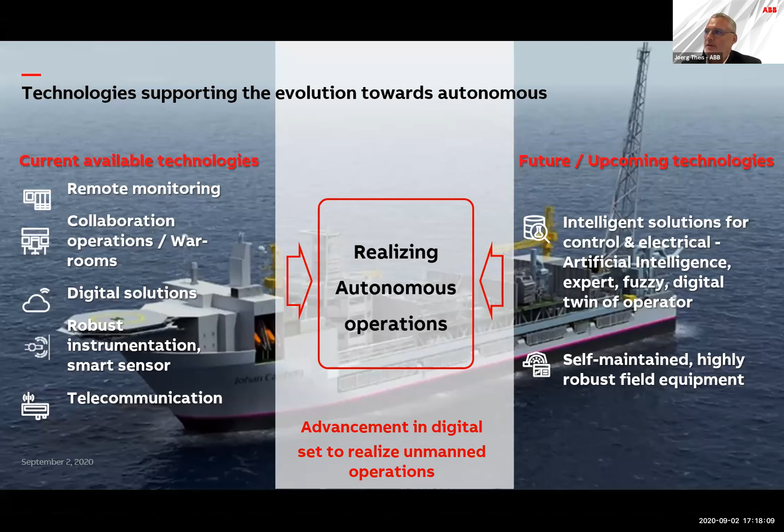So digital is definitely one element which can really help us address the challenges we are facing today. Going to the next example: remote. We see more and more that remote is becoming the new normal. I remember from last year's discussion that oil and gas, especially the FPSO industry, is quite conservative — and I fully understand this, to really go for reliable and proven technology.

But now, especially — this is a real life case we had with a customer who doesn't have digital in place, who doesn't have a good connection from his FPSO to the land site. He called us with a problem on one of his switch gears, which had started to impact his offloading and water injection.

That could definitely have caused a loss of production for him. Based on current regulations, we offered to send an engineer, but it would take more than two weeks to get him on the FPSO to fix the problem — something not acceptable for the customer. So we said, okay, we have solutions available today. Are you willing to test it?

The customer agreed, and we started what we call remote insight. It uses limited bandwidth of communication and some AI type of application, and we set up everything within 2 days.

We were then able to use our experts from around the world together with an operator of the customer using VR goggles to check the situation, eliminate the root cause of the error, and fix it.

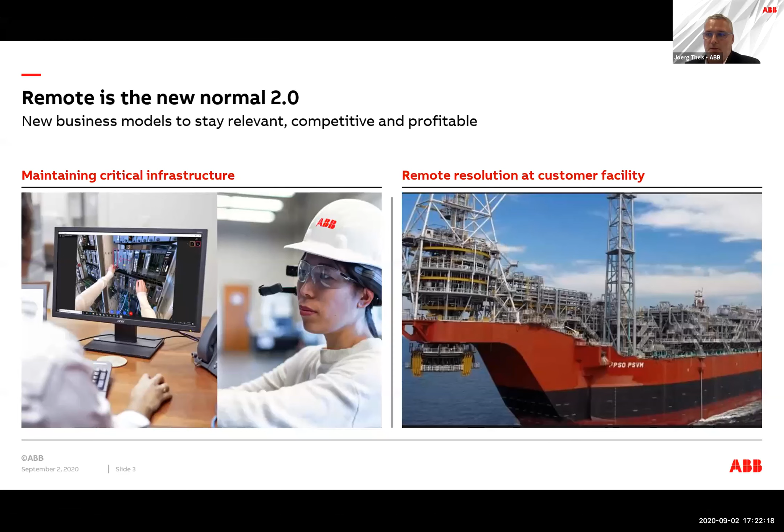Coming to the next model, and this is a case study with OKEA. The plant is rather old, from the 90s, so not very well digitally connected, and the customer is facing obsolescence problems. The key topic here is that we're really trying to have a collaboration in place with the customer to figure out how we can make those things happen.

One key element here was that we are really dealing with raw data. We're not consolidating data and sending a concentrated set to the specialists. We now have an edge solution together with the customer, and we can send raw data within milliseconds to the collaboration center. The customer is able, with the raw data, to get much better insights than with consolidated data from a historian application running on site. Interesting message here also: it was not as complicated as we thought.

We can send raw data from at least 10,000 tags within milliseconds to the site. It's 180 kilometers from shore, so quite a distance already. By having the raw data, experts are able to predict much better, using much better mathematical instruments to derive key insights. And again, you don't need to be on site, you can do it remotely.

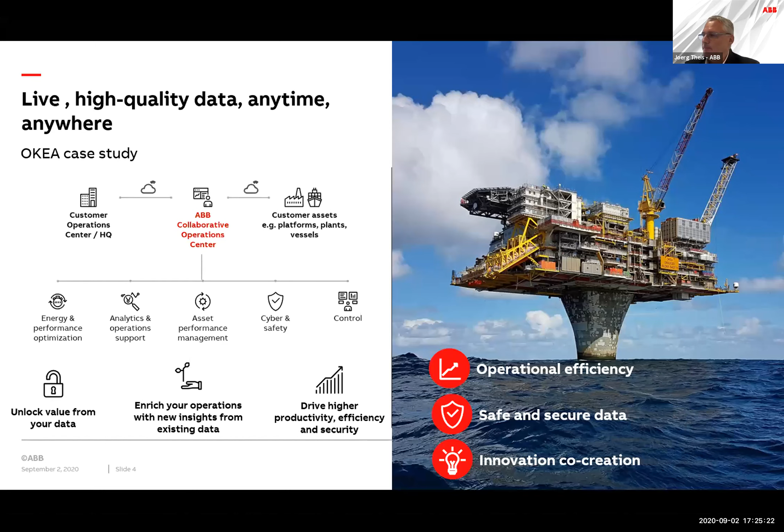Coming to a topic: we are all seeing now the market is becoming more unpredictable. I think the oil price was nearly turning into the red zone. A lot of challenges are going on in the market, and it's becoming faster where we have to react. For sure, all of this is definitely leading to the fact that we have to ask, okay, how can we do things smarter? How can we do things in a different way? And importantly, how can we be more efficient?

I know that oil and gas is very strong on its own type of standards, its own type of data models, and not sharing information even between companies, let alone outside companies, and of course not following any type of standards. But seeing how the market is going, seeing all the trends and pressure coming, we definitely have to start embracing some of the existing knowledge and technologies that are valid in other industries. I think automotive, for sure, is one of the trendsetters on how to do things in the most efficient way possible, how to embrace those elements.

And even if we don't jump to those type of elements, it's definitely worthwhile looking into the details and say, okay, what is it that we are able to do? On this slide, you see some elements which can only be done on the engineering side. I know we always think immediately about tools and low-cost engineering, but when we really go into the details, there are much more levers and elements you have to consider if you really want to become much more efficient.

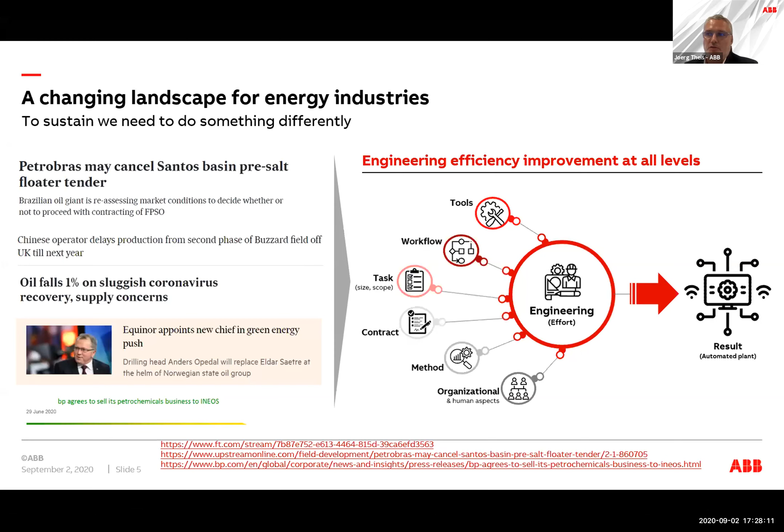Yeah, thanks, Jörg. And I think you have put up a few keywords which pretty much sum up the whole scenario here. You mentioned standardization, you mentioned data, and most importantly, you mentioned people. And from that perspective, people do projects, and the industry knows us as a large supplier of automation equipment, as supplier of electrical equipment, motors and drives, but we are also a very large project execution organization, always in pursuit of relentless execution.

Some of the figures that Jörg has talked about earlier - reducing capex, improving schedules, reducing start-up hours - those are the things that we have learned over the years executing large capital projects, using the levers, the processes, the technologies, and the people, whereby we are using different methodologies to actually reach these figures and make sure that we live up to our promises.

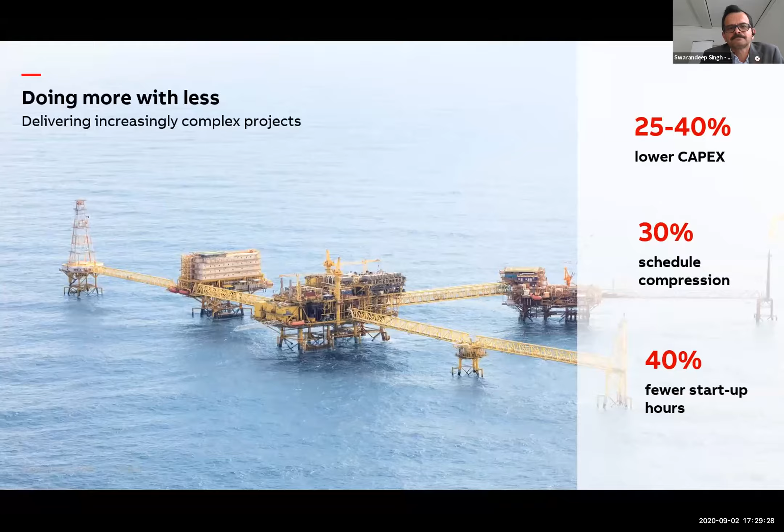If you go to the next slide, Jörg. So what we have been seeing in the past is before COVID, labor arbitrage was the thing. Most of the companies were leveraging their low-cost centers and trying to improve the cost and reduce the capex and the risk. And as we know, COVID has been a great disruptor here in the way we are going to work - remote abilities to work remotely, abilities to include more automation.

I think it acts as a catalyst, as was mentioned earlier, and then it allows us to use some of the modern technologies which we have at our hand and which we have been using for some years, but not as a common practice. So we are using virtualization, decoupling the hardware from the software, making the execution more predictable, bringing in a lot of standardization into our execution models and with respect to the solutions that we apply, a lot of reuse capabilities, which are allowed by the use of modern automation technologies. And all that sums up to the kind of promises that we have made earlier.

And all this is made possible because more and more customers are now being forced into this situation where they're embracing this kind of hyper automation, if I can use that word, so as to make sure that they are able to reduce their capex in case of large capital projects. If you go to the next slide, Jörg.

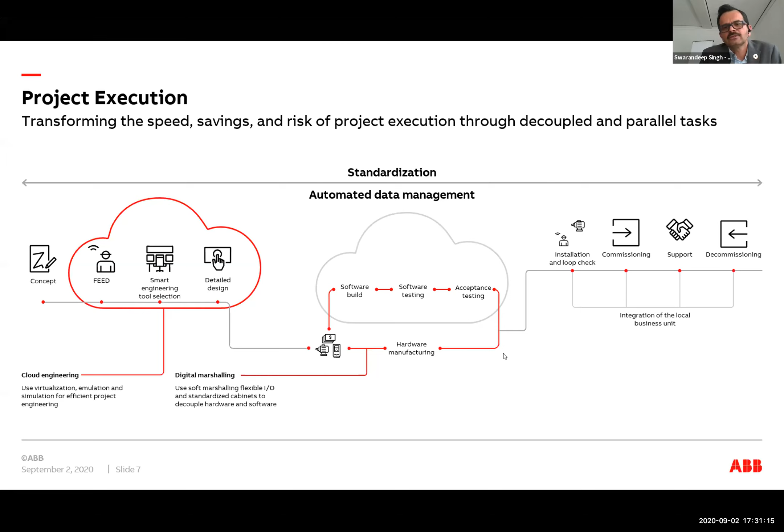So more recently, we have a couple of examples here. We have a project, Johan Castberg, that's an FPSO in Norway being built currently in an FAT stage for Equinor. And here we are using the remote FAT capabilities that we have developed. We have used some of the modern technologies inside the project execution, stuff like decoupling the hardware from the software, a more data-driven approach to execution rather than based on documents. So we have created interfaces, APIs and tools whereby we can import data from the various engineering contractors into our internal engineering systems and reduce manual work, which then improves the cost, improves the quality, and then you have less errors at site, which allows you to start up on time.

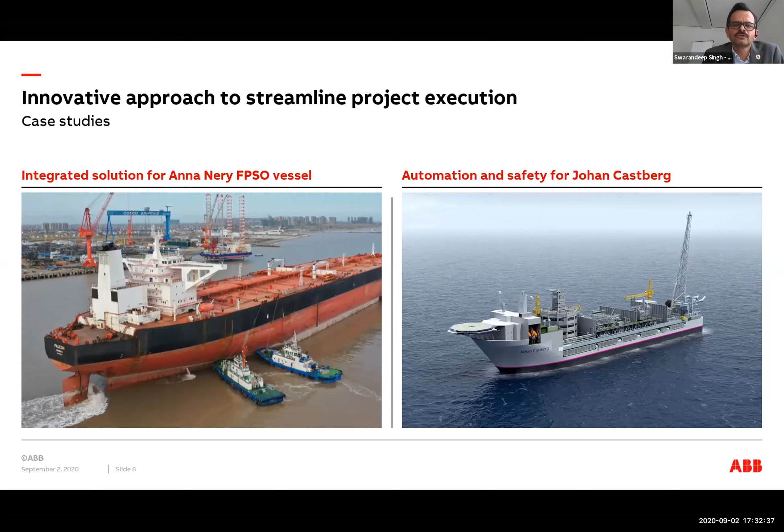So what we see is we started off with this transactional approach of having these point solutions. We have tasks, different tools, different methods related to agile and lean, all leading up to how we can make projects more cost effective, how we can deliver on time, and how we can reduce risk. Those are more tactical and transactional tools that we have at hand.

But the industry is also now going towards a more strategic approach whereby we are getting into a different kind of contracting model which allows us to improve the way we work together. It improves collaboration, so we have less interactions, less conflicts, and less interfaces.

We have also had such experiences with some projects around the globe, specifically with Aker BP in Norway. For some of their projects, they have already gotten into this alliancing kind of agreement whereby it's a win-win for all the contracting partners.

So I think the industry is definitely in a transformative mood now, which is being catalyzed by the COVID disruption. We would definitely see that the tools, methods, and efficiencies that we have developed over the years, we are able to synchronize them and apply them to upcoming projects, thereby improving the costs and efficiencies, and delivering on time and on budget to our customers.

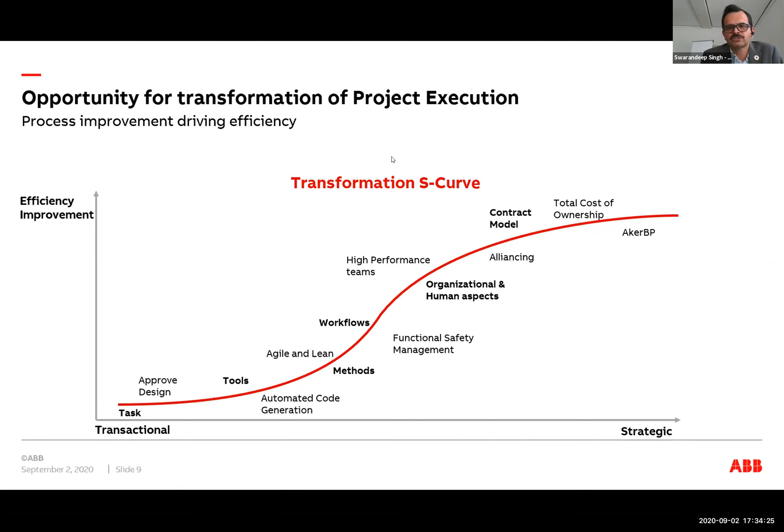Yeah, so that was a quick view on some of the project execution aspects which we are working on currently, and also where the industry is leading into. So I think we can field some questions if there are any.

Yeah, that's great, Jörg and Swarandeep. I liked how you mentioned the people element. They like to quote that something like 70 or 80% of digital transformation pilot projects fail because people don't take account of the people element.

Correct. They still have the same sort of decision hierarchies. They don't use agile teams, they don't change workflows. How do you work with customers to change how they're changing this kind of work culture and workflows? Do you give them advice? How do you help the customer?

I think that's a very good discussion, because we have exactly experienced this in an example where we had a ready solution, and the solution was really working and was in place, but the customer was still working as it was always getting done before. Then when we started discussing it, they started realizing how important it is to really have this type of change management.

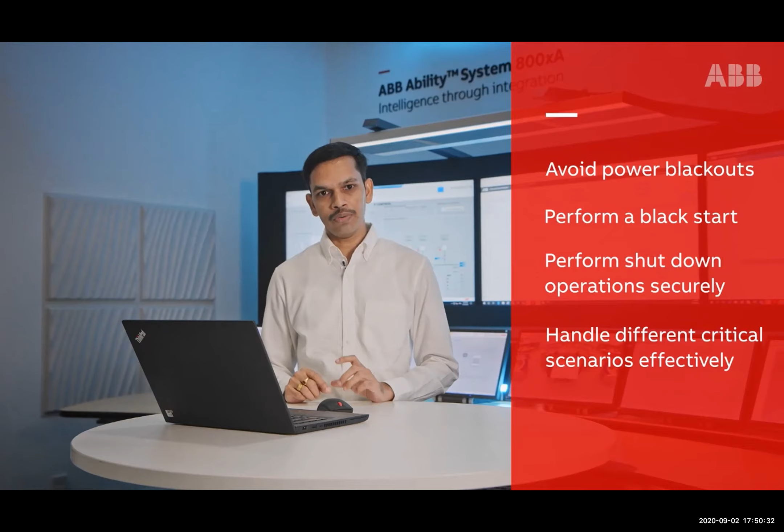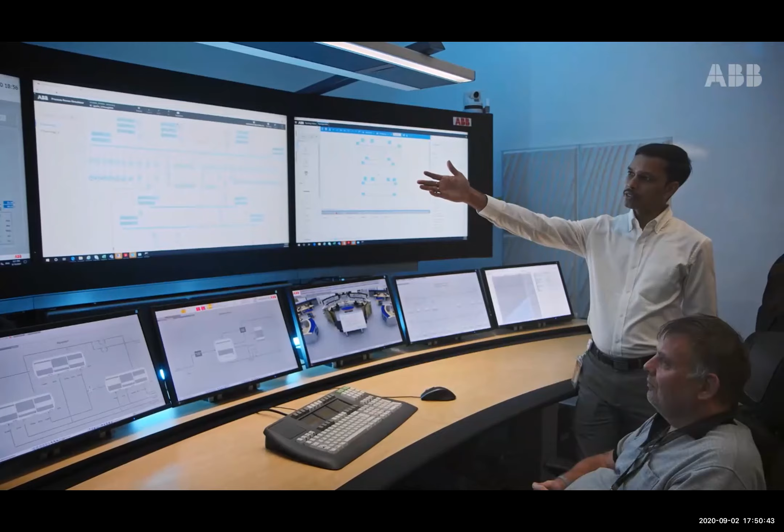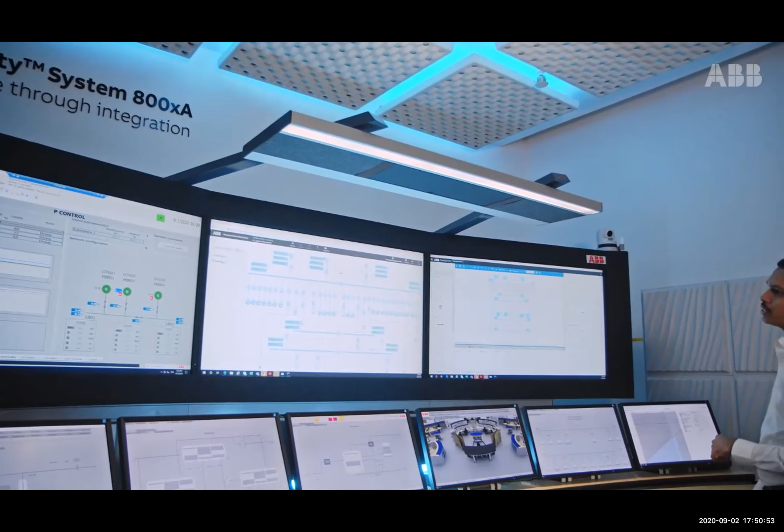ABB Process Power Simulator has a unique function and goes beyond what a process model vendor typically provides, as it combines a copy of the electrical plant control system along with simulated electrical dynamics to provide the operator with a more live-like experience. Integrating with the control system provides a digital twin for your operations.

In other words, it's a safe way to train your operator to learn the system which they rely on in real-life scenarios. Process Power Simulator has two parts: a topology editor to build an electrical model, and secondly, an instructor workplace to simulate different electrical scenarios. Let us take a look at how to demonstrate building an electrical network using the topology editor.

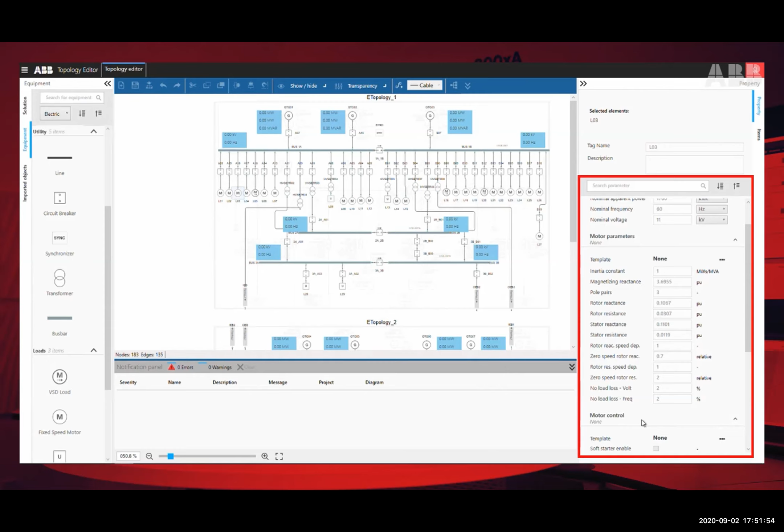ABB Process Power Simulator makes it easy to create an electrical model with a single line diagram. Through a topology editor, you can build your own electrical model by dragging components and connecting them to the electrical network. You can also set basic and advanced parameter settings of the equipment to replicate your plant behavior and then save the model. Next, you can switch to the instructor workplace to simulate plant electrical dynamics for different scenarios.

Here in the instructor workplace, we can create different scenarios by selecting and controlling motors, circuit breakers, and generators. ABB Process Power Simulator dynamically models frequency, voltage, active power and reactive power according to the equipment characteristics and generator response you define in the topology editor. To test electrical dynamics, we will run through the scenarios which are most frequent in FPSO operations.

Let's begin with starting a generator. To start a generator, click on the generator, make sure it is in local, and press the start button. Once you start, the generator builds up its voltage and frequency like you see on the screen. Once it reaches rated voltage and frequency, we can close breaker A15 to connect this generator to the network.

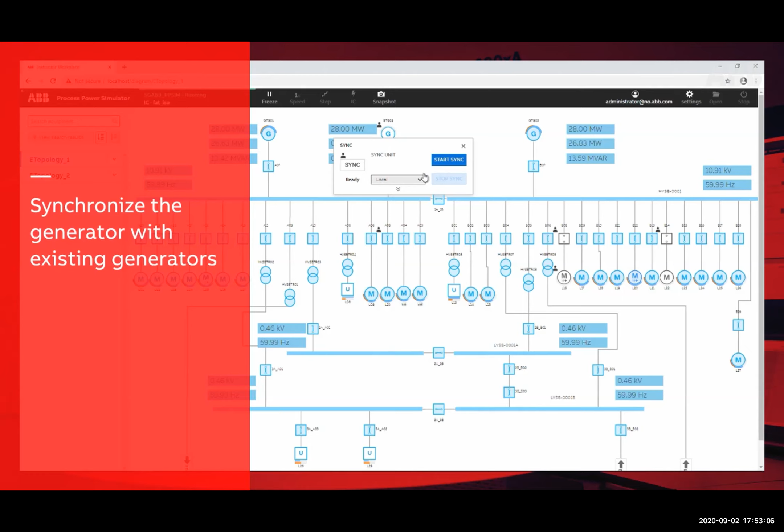To close breaker A15, we have to go through a synchronization process. To synchronize A15 to the network, select the sync module, select the breaker we want to close, select the generators we want to synchronize, then click on the synchronization module and start synchronization. Once you press start, the synchronization process begins, increasing and decreasing frequency with respect to variable and reference. Once it matches, it closes the circuit breaker. Now you can see all three generators are connected to the network.

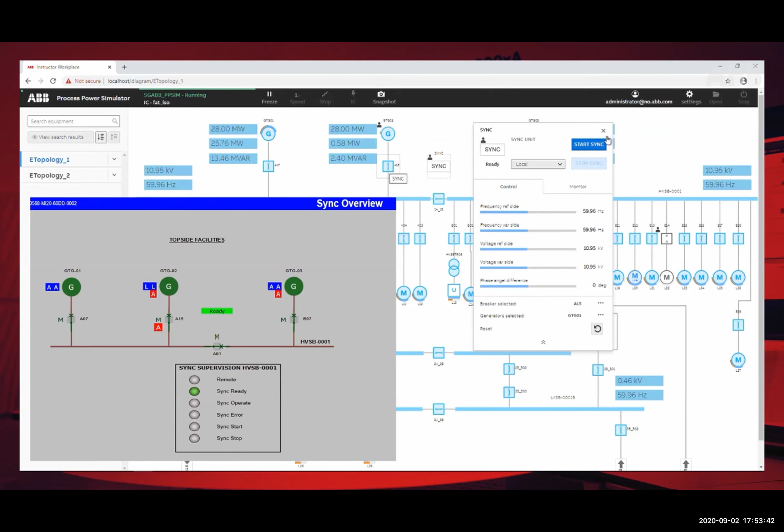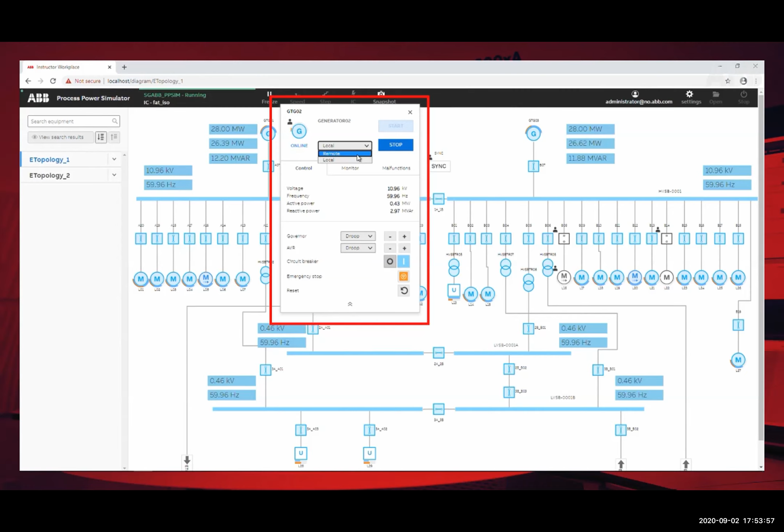So the next topic, once we have the three generators in the network, is to share the load among them. To initiate load sharing with the existing generators, we have to give control to remote. Once we give control to remote, the remote operator will select the mode of operation. In this case, it is P control and Q control, so that they can equally share the loads in the network. So once the operator sets P and Q control, the new generator starts picking up the load and the existing generators start releasing the load.

Here you can see the trend. The existing generators 1 and 3 are releasing their load and the second generator is picking up its load, and this goes on till they are all equally shared. And then we can control this equal share or unequal share in the remote control system by selecting equal and unequal control. Now you can see all the generators have reached a level of equal loading in the network.

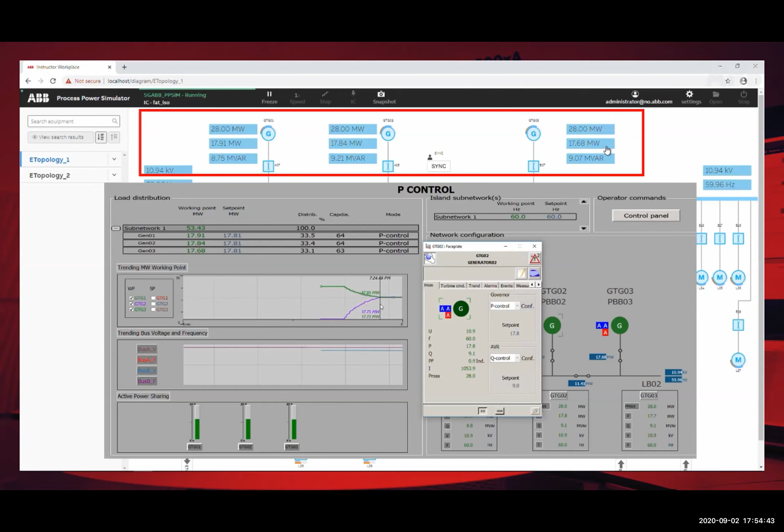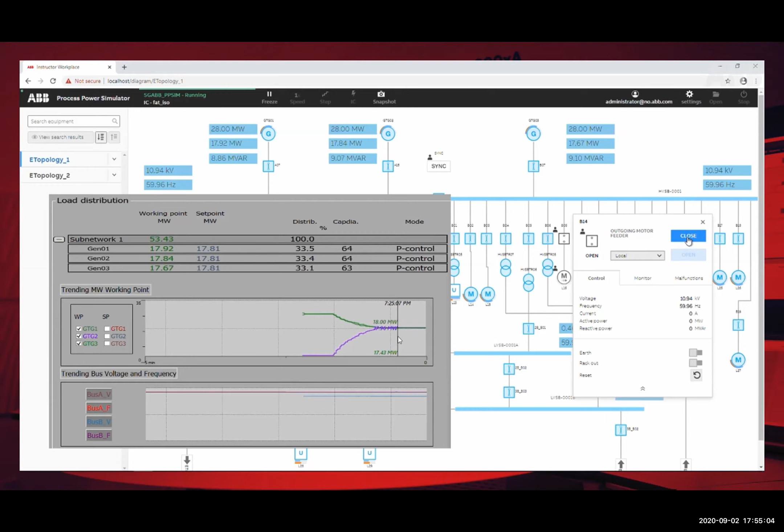Now once all three generators are stabilized and sharing the loads equally, let us simulate a scenario of starting a DOL motor and verify the generator response. To start a DOL motor, click on this breaker and click close. Once you start the motor, you can see the response at the starting kick of the motor in the HMI. You can see a sharp rise and then it later settles.

Now let us see how our generators will respond to starting a VFD motor. To start a VFD motor, click on the VFD, select start, and you can see the response of the generator. It's a smooth ramp, not a kick, it's a smooth ramp.

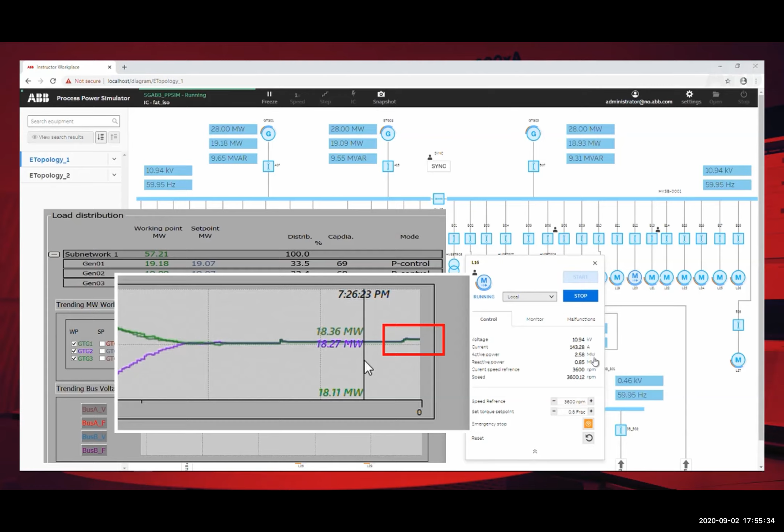After that, we want to test a malfunction of a generator, which will lead to a blackout in a normal scenario. But using ABB Process Power Manager, the intention is to avoid such blackouts. So let us simulate a malfunction in the network and see how the control system responds to it.

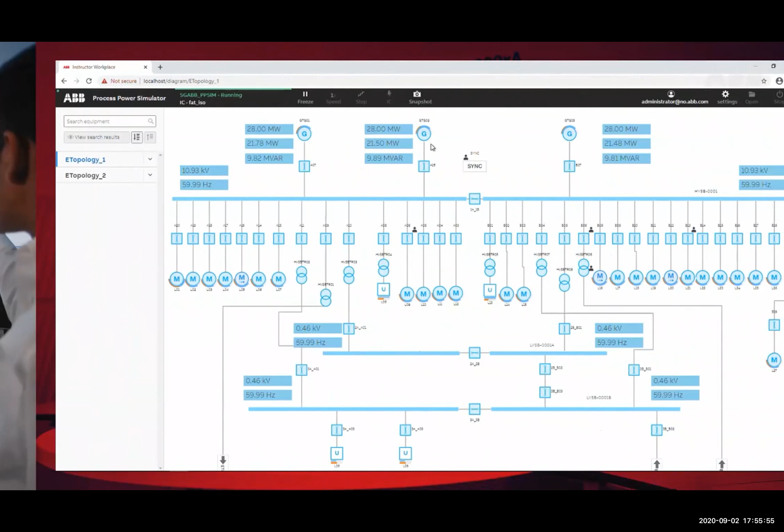To initiate a malfunction, click on the generator, go to the malfunction tab and click on malfunction. Now you see once you click on malfunction, it triggered a load shedding.

Once the load shedding is triggered, the transient window will pop up where it records the transients of the network, voltage and frequency. You can see a dip in voltage and frequency, corrected back by the other two generators working in the network to system voltage.

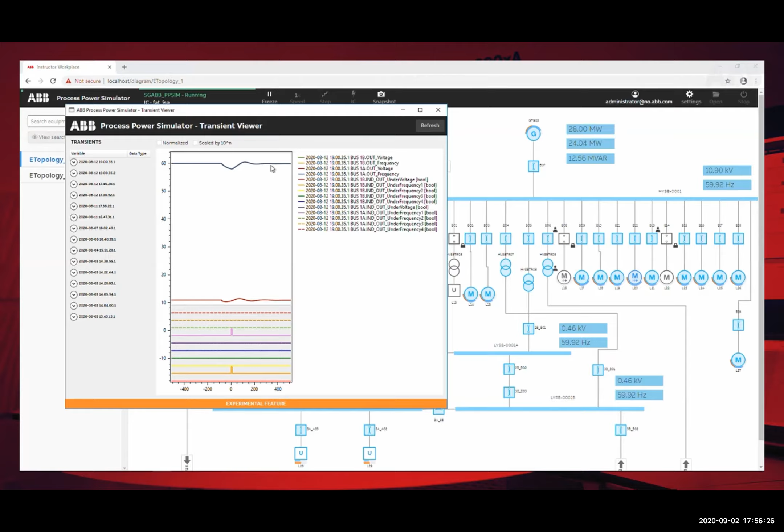With all relevant information at your fingertips, it's easy to tune protection settings, generator parameters, and load shedding priorities. ABB Process Power Simulator provides a realistic way for a new operator to familiarize themselves with your system and learn to

respond to a critical scenario or malfunction in a safe manner. Having a digital twin of your actual system, you can simulate your plant operations for the whole life cycle, from design to start of production, which helps you optimize operational performance.

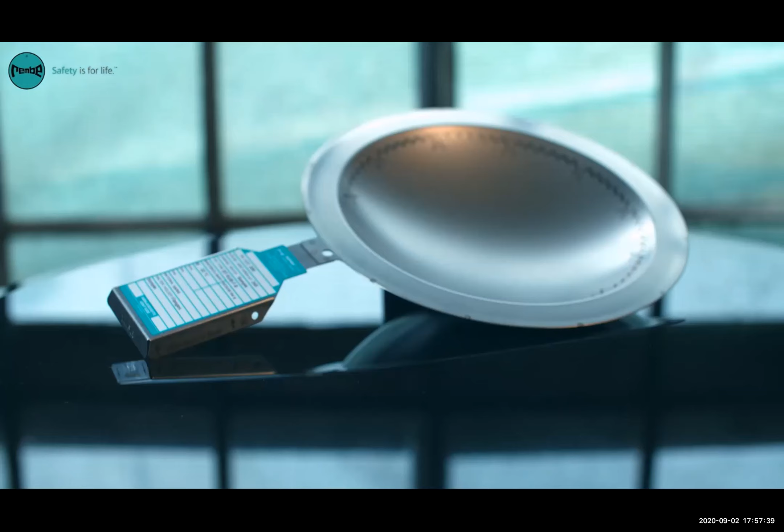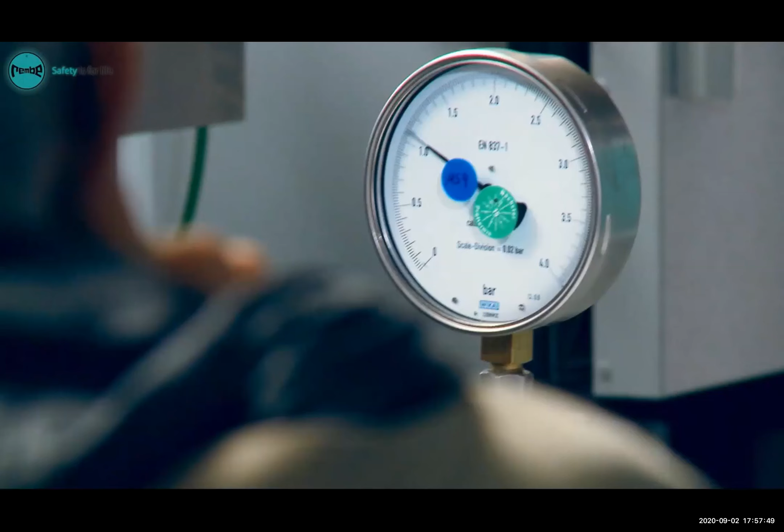REMBE in Brilon, Germany has been manufacturing top-quality rupture discs and pressure relief systems since 1973. Thanks to its wide range of specialized relief solutions for safe and sustainable service, REMBE has become a world-renowned player in the process industry.

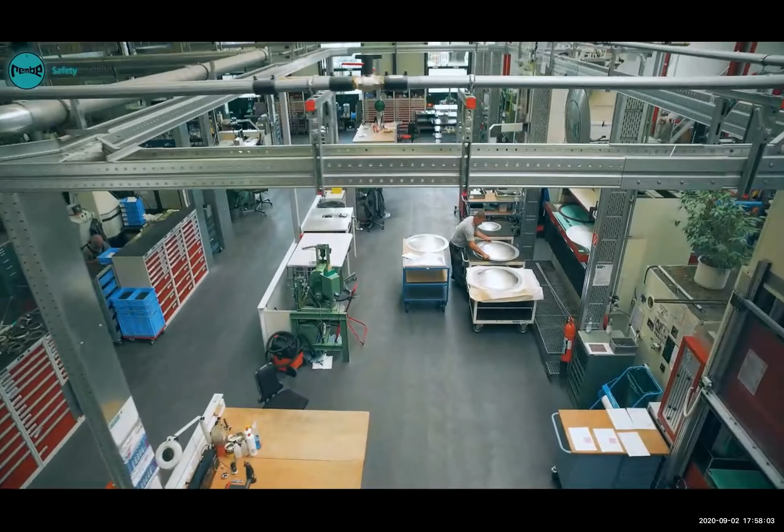Friedhelm Kesting has been leading REMBE's production facilities since the very beginning. My name is Friedhelm Kesting, and I've been with REMBE for over 42 years.

Purchasing the first laser welding equipment at the beginning of the 80s was certainly a milestone in the company's history. REMBE has been a user of laser technologies from the very beginning.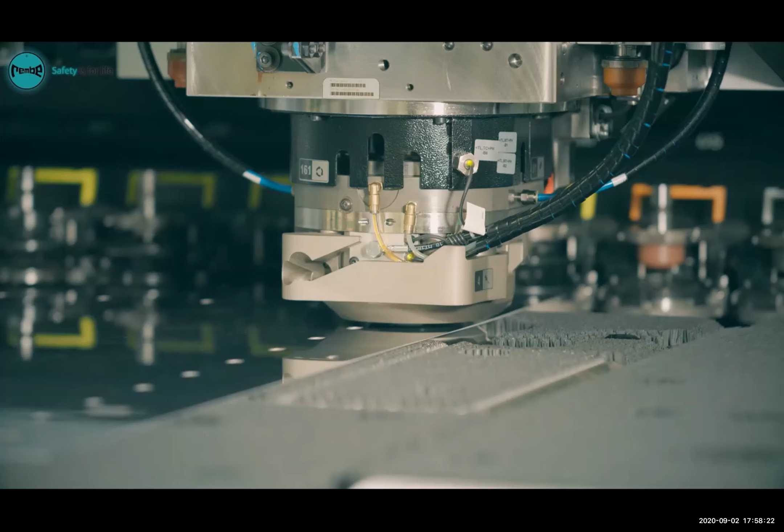As well as having customers in the chemical, petrochemical and pharmaceutical industries, REMBE works with large EPCs and shipyards around the world on important FPSO projects.

I have been personally working on FPSO projects for REMBE since around 2005.

Pressure relief is required for many different parts of the production processes on FPSOs. Working on FPSO projects is perhaps the only time we are asked to supply so many different disc types at the same time to protect all the individual processes.

Rupture discs are used on a range of FPSO applications due to their rapid full-bore relief, reliable burst control and compatibility with other pressure relief solutions.

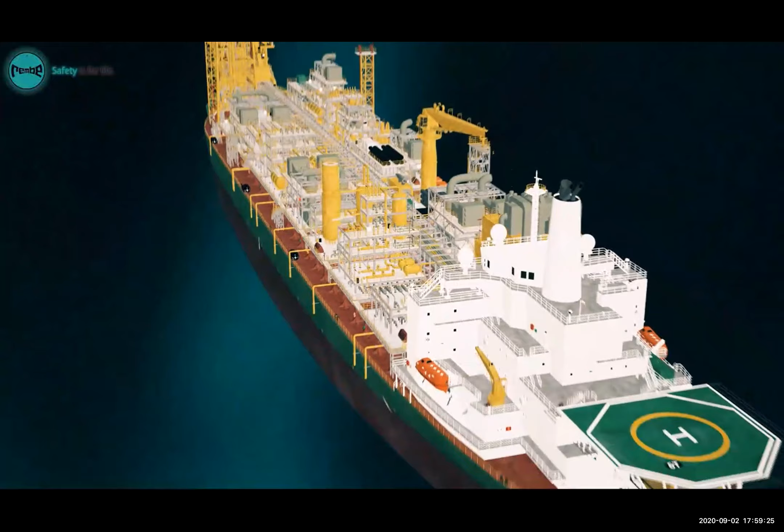Complying with critical material specifications, REMBE's rupture discs are available in a wide range of advanced and highly corrosion-resistant materials, while complying with NACE and NORSOK standards when required. Each FPSO project contains many different types of rupture disc.

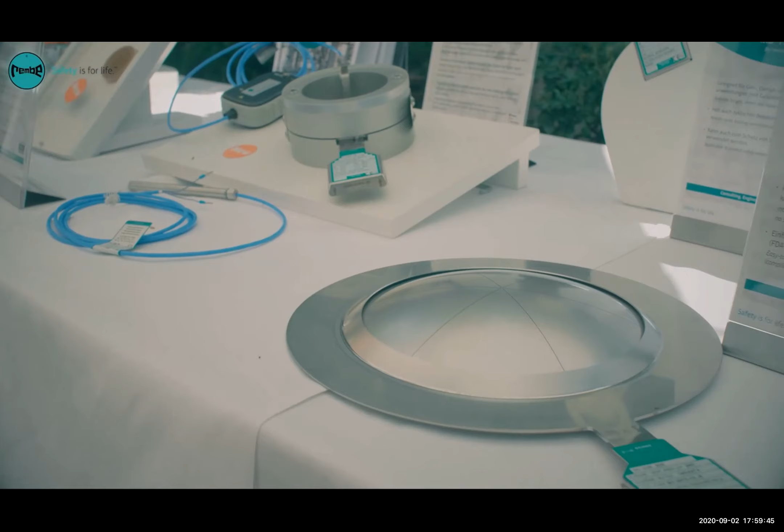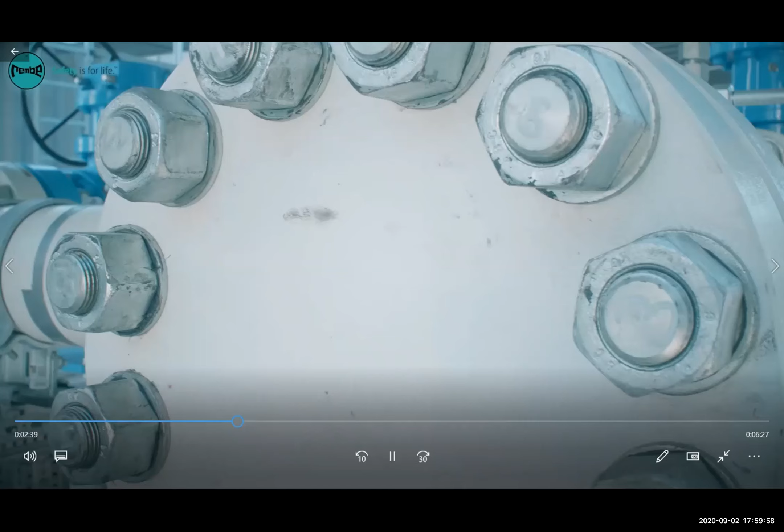Now let's have a look at the oil and gas separation. The oil and gas separation and treatment process is a safety-critical application using pressurized vessels which require pressure relief protection to ensure safe operation.

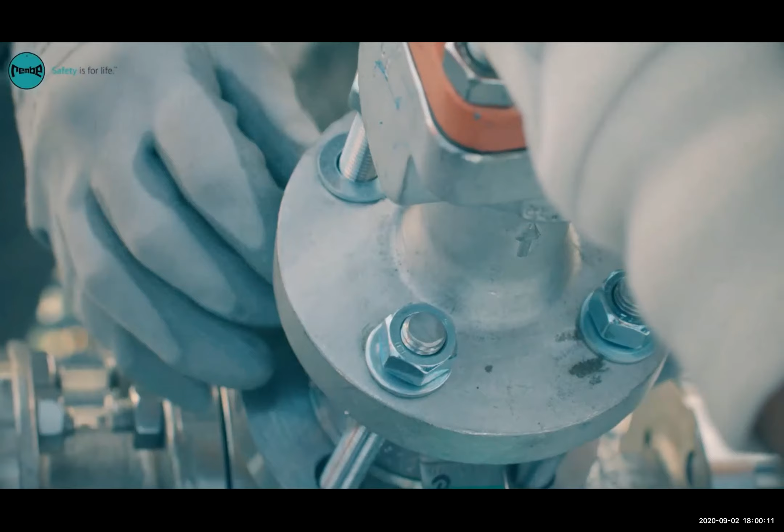Rupture discs are frequently used in combination with a safety relief valve as a secondary relief device.

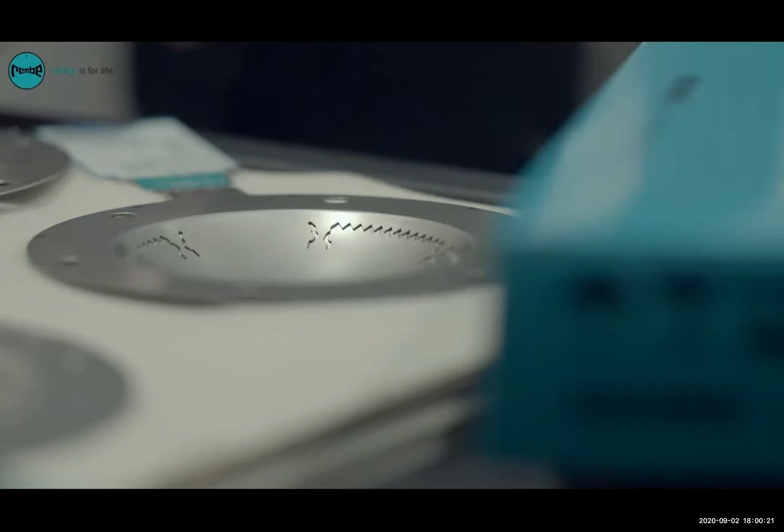REMBE's masterpiece is the unique KUB rupture disc with incorporated laser-cut buckling elements that allow exact burst pressures and maximum lifetime of the device. Continuous quality checks and burst tests prove the impeccable performance of the KUB.

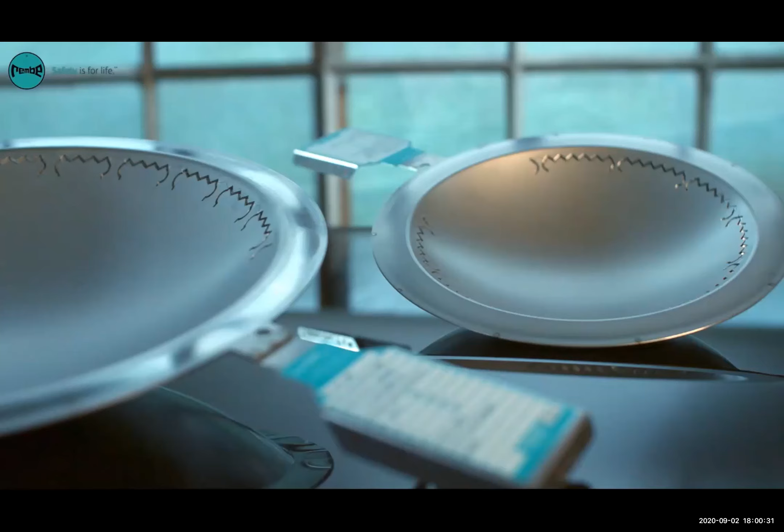The KUB is used in all kinds of industries, in gas or liquid services, and has proven its performance in thousands of applications over the last 30 years.

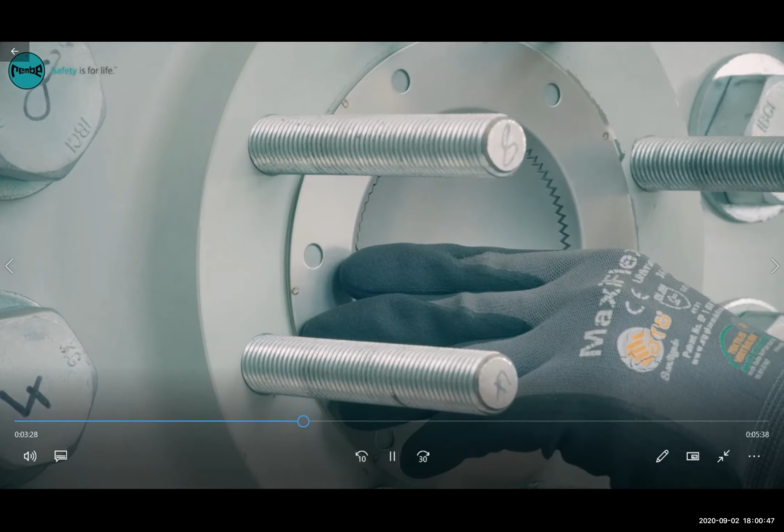The two-layer construction ensures robust handling, a very high operating ratio, and a torque-independent installation of this rupture disc.

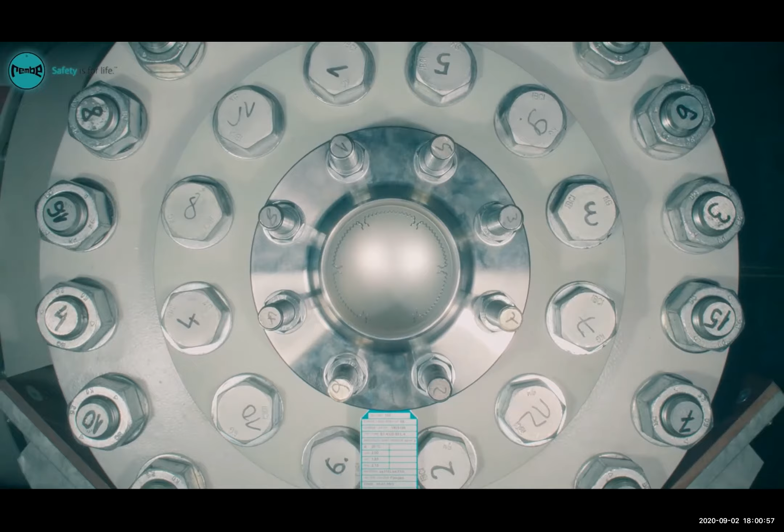The KUB provides full bore opening upon burst. The sealing membrane wraps around the buckling pin element, and fragmentation-free opening is guaranteed.

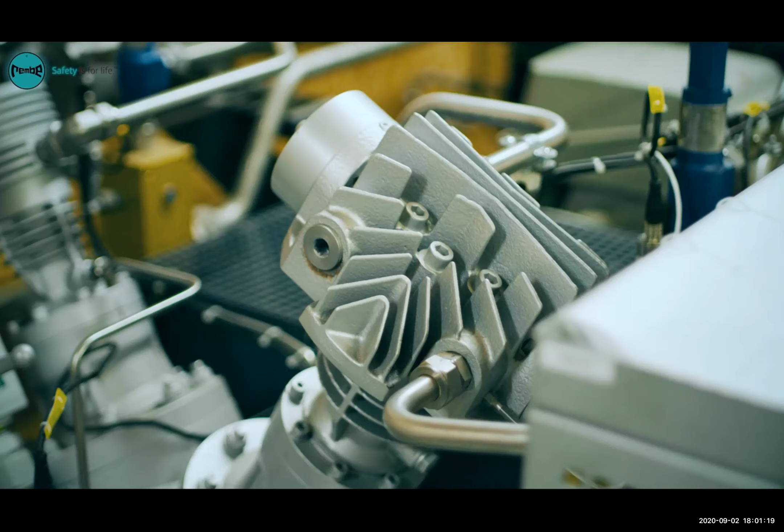And here are the gas compressor module and the heat exchangers. Rupture discs installed on a gas compressor module are designed to protect the tubes on a heat exchanger from exploding due to overpressure. Rupture discs are used due to their speed of response.

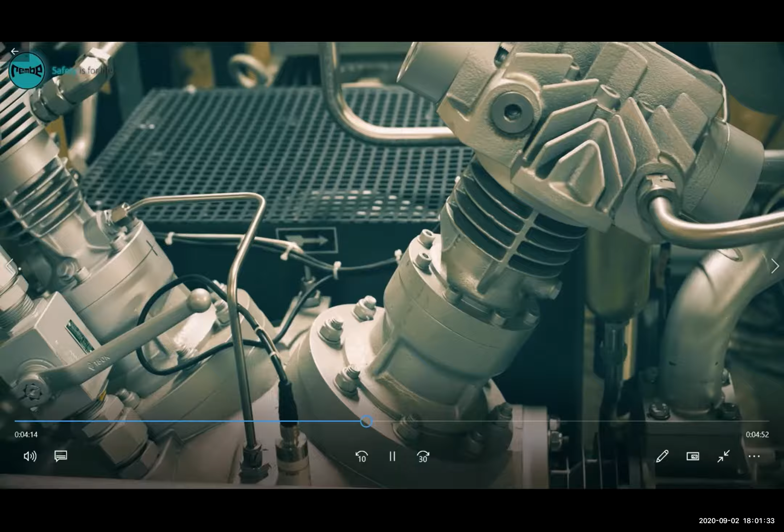REMBE's IKB is such a high-speed disc. Its single-layered reverse-acting design has specifically been developed for projects such as FPSOs.

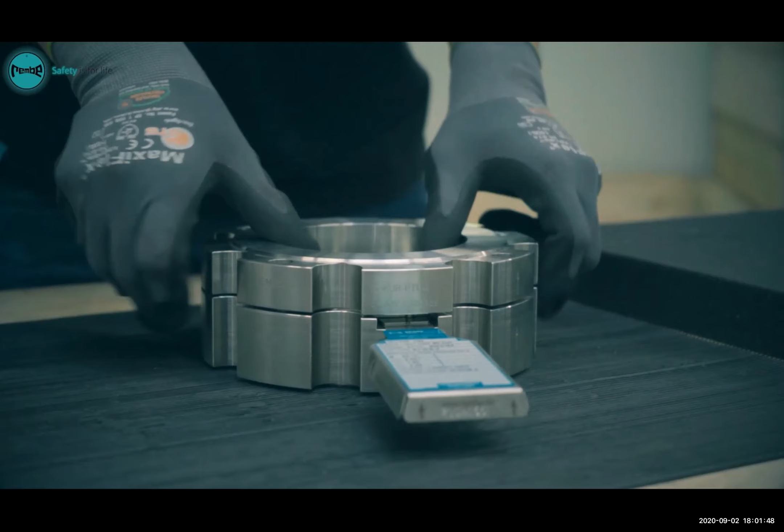The peripheral opening pattern provides full bore opening, and the style of the disc ensures a very high operating ratio and a good opening behavior for this type of rupture disc.

And finally, we have the flare stack.

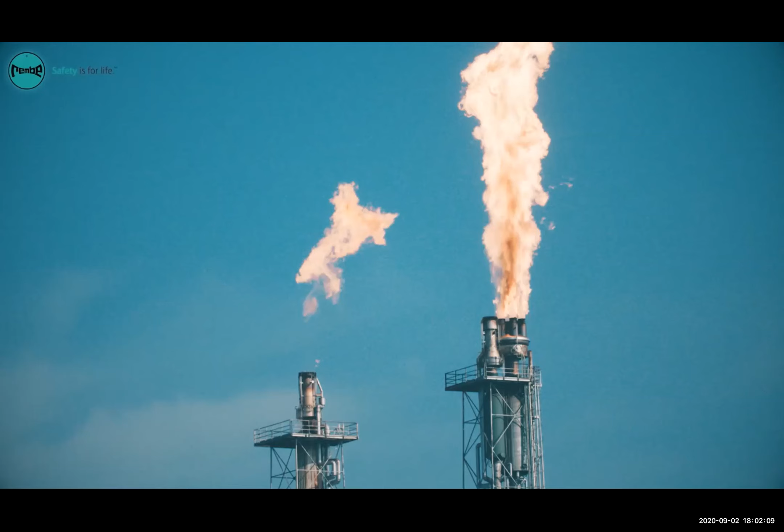Protection of the flare system is critical. In the event of overpressure, the activated rupture disc will safely vent the pressure to re-establish the path to the flare, which is ignited to burn off the unnecessary gas.

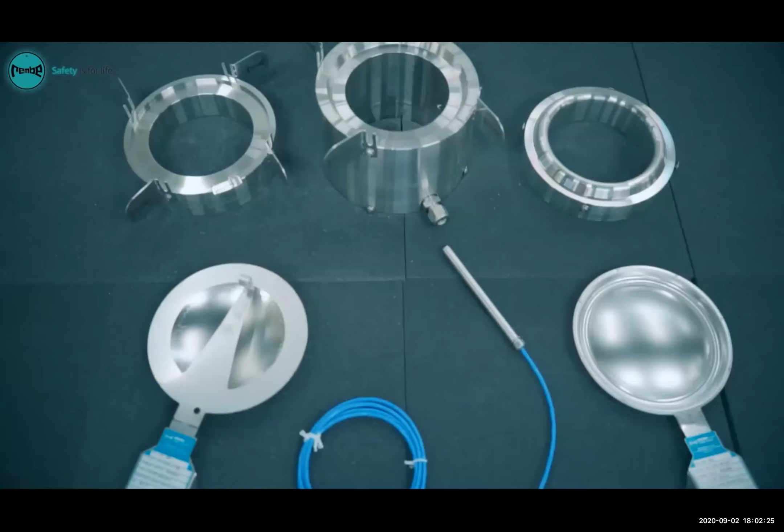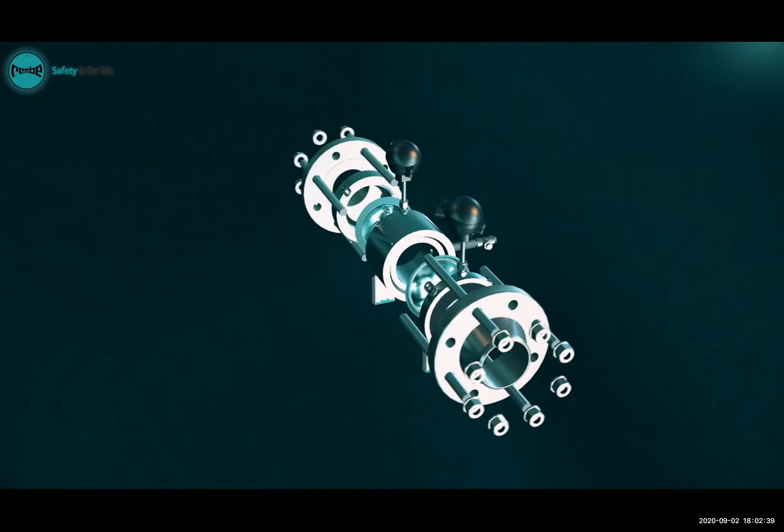REMBE's double disc assemblies can either be a combination of two forward, two reverse acting, or a combination of rupture disc types dependent on the particular process conditions. The primary function of the assembly is to protect the primary disc from variable back pressure.

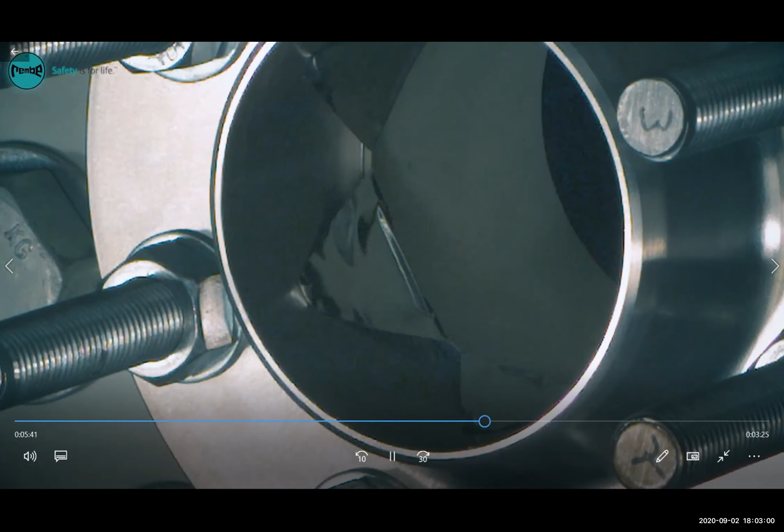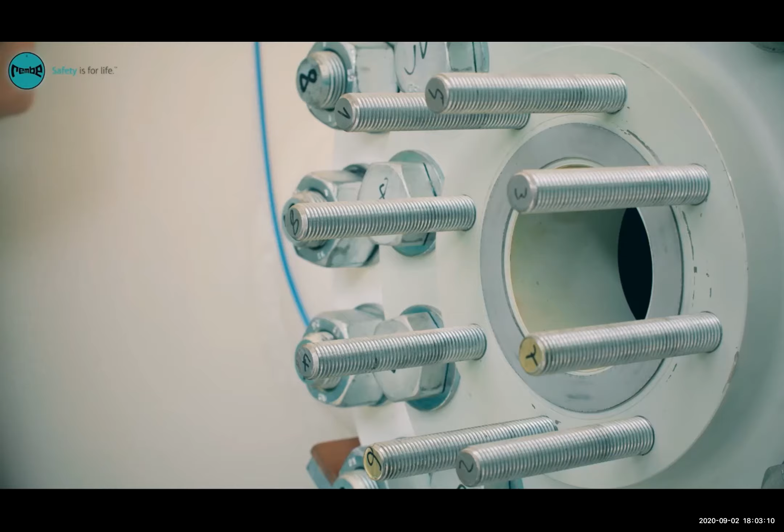The perfect disc for flare stack protection is the SFD. The SFD is a single-layered forward-acting disc. The paddle-shaped burst elements provide an exceptionally good pressure cycle resistance and perfect opening behavior, all made possible by the REMBE exclusive CPL technology, Contour Precision Lasering.

Thanks to REMBE's own CPL technology, we supply high-performance bursting discs for cost-effective and reliable solutions for our customers.

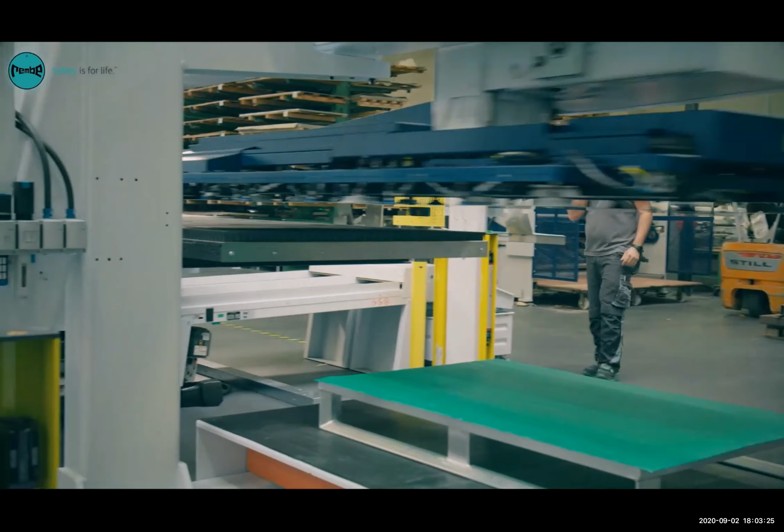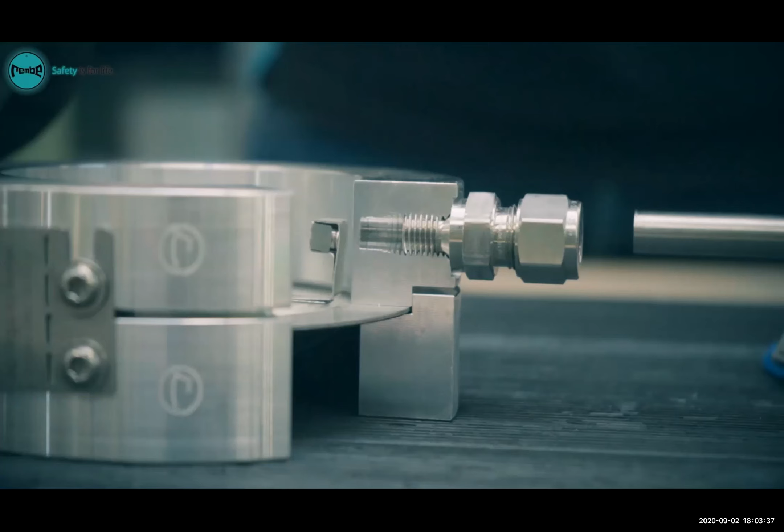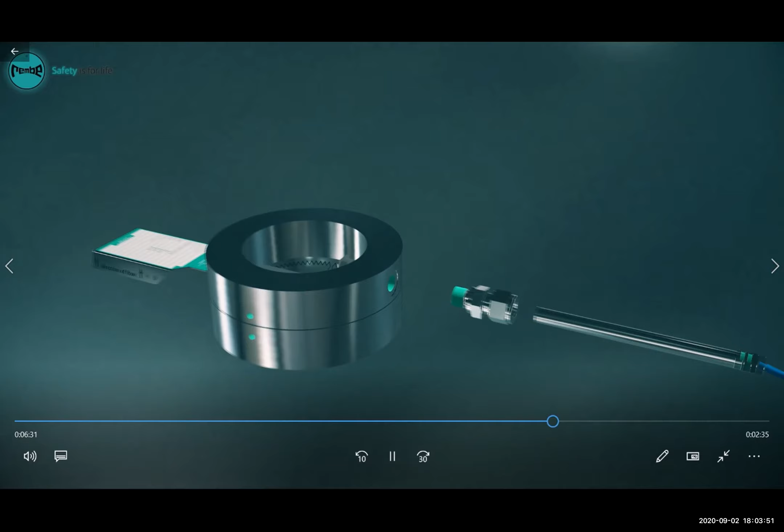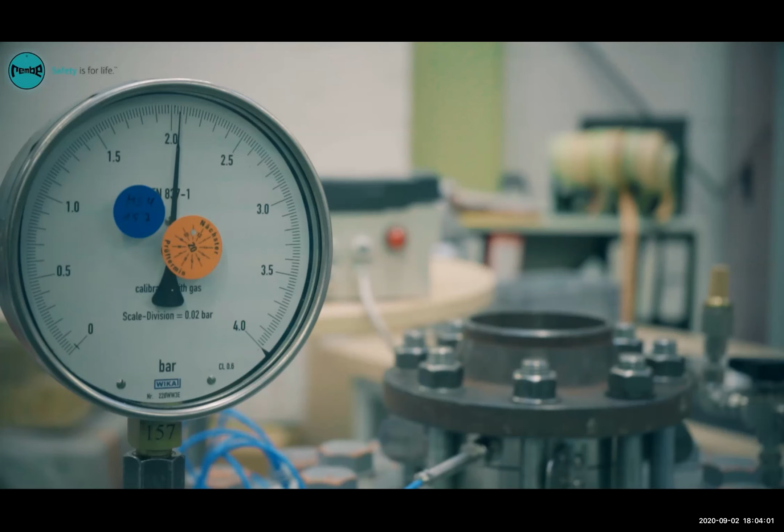REMBE discs can be used in combination with signaling devices such as the reusable non-invasive NEMU for signaling of the disc's function. The NEMU sensor is mounted in the outlet of the holder without direct contact to the process. Once the disc opens, this breaks the circuit within the NEMU sensor and sends a signal that the disc has activated. Once installed, the NEMU does not need to be replaced after the disc has burst.

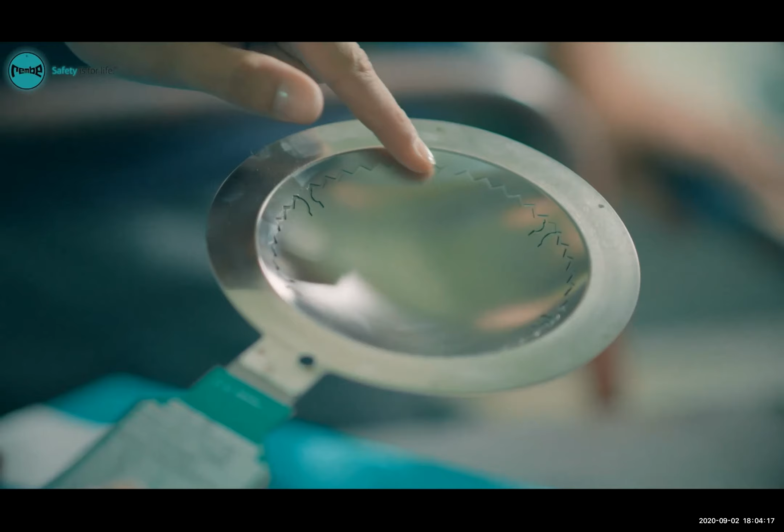REMBE's work within the FPSO industry doesn't end with product design. In line with their policy of consulting, engineering, products and service, REMBE's engineers are available to support with troubleshooting, installation issues, as well as difficult design challenges.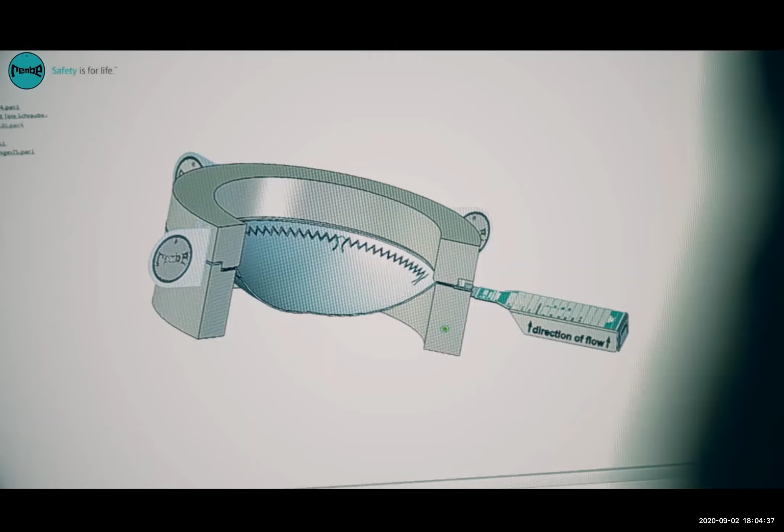Dr. Stefan Rüsenberg, Chief Technology Officer at REMBE, has a typical case study for you where REMBE engineering saved both money and space for a tricky heat exchanger application.

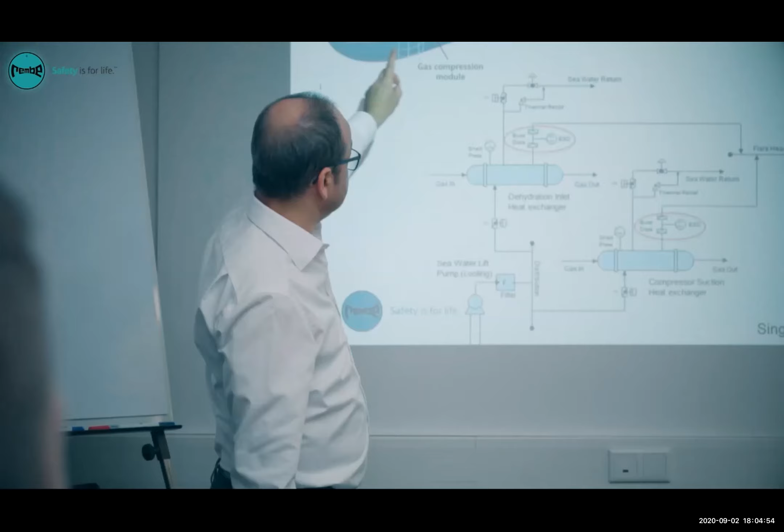An engineering company from the oil and gas industry asked for support to improve their safety concept to protect the heat exchanger. A multi-phase flow has to be relieved into a flare system with variable back pressure protected by a 10-inch relieving device. By some well-engineered improvements, our safety concept is providing a 4-inch double disc design relieving into a 4-inch relieving pipe.

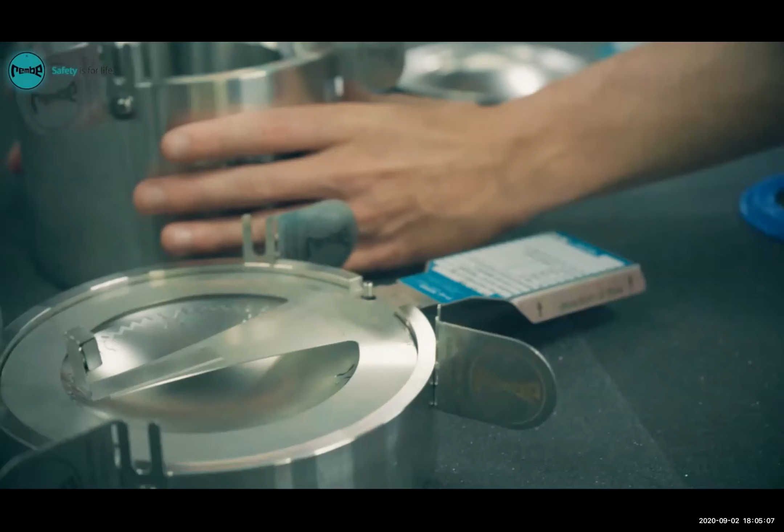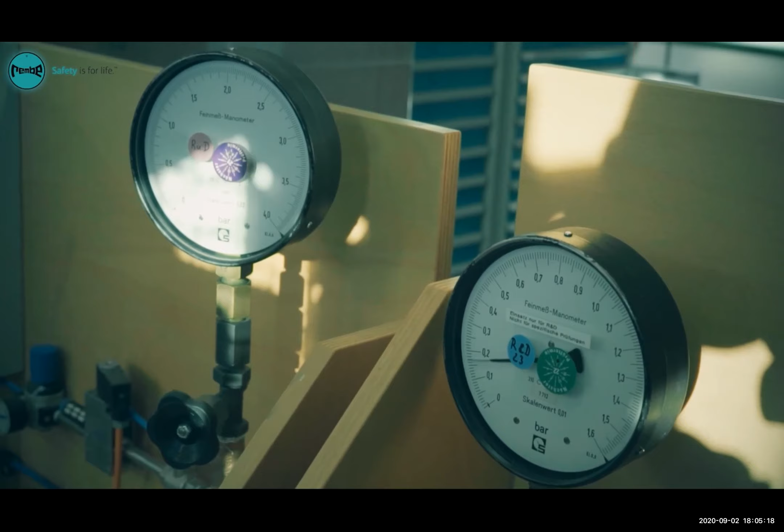The upstream disk is protecting the heat exchanger against excessive overpressure, and the downstream disk is isolating and protecting the first disk against the variable backpressure. This leads to a robust and practical solution which saves space and reduces costs of the relief device as well as the discharge release system.

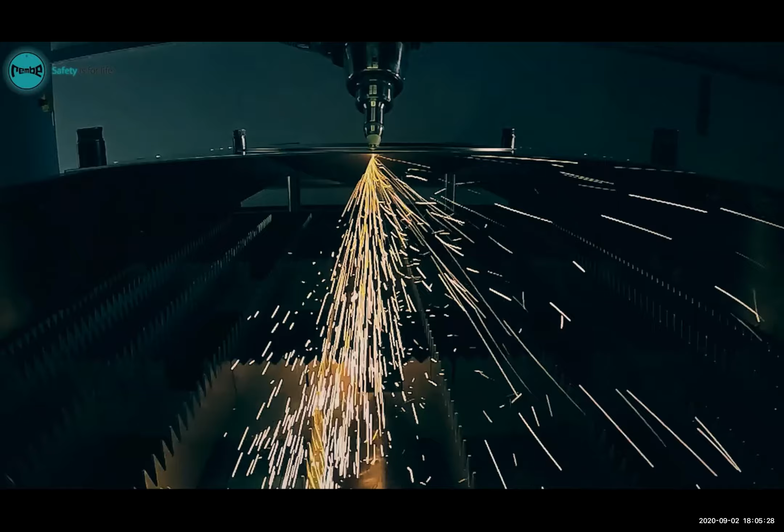From a wide range of safety products to the engineering of turnkey solutions, REMBE is your perfect partner for pressure relief in the FPSO industry.

And if an overpressure event results in a stop in production, the REMBE Rush Order service is available to manufacture replacement rupture discs within 24 hours to get production back up and running as soon as possible.

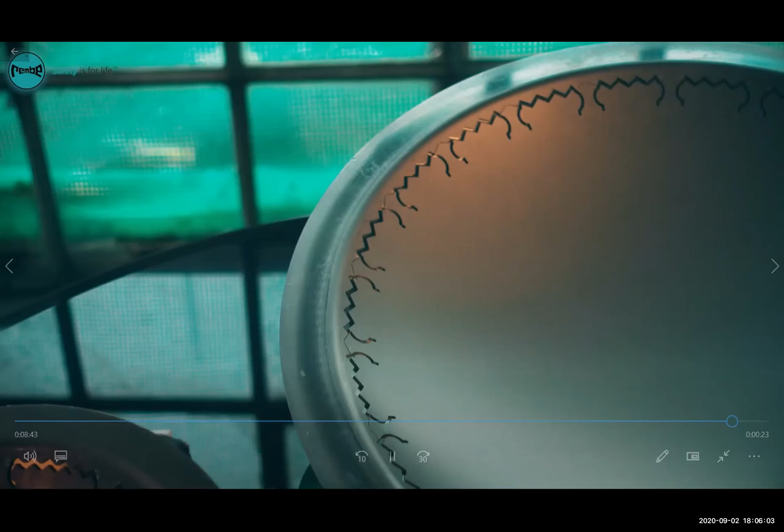Whether laser welding or laser cutting, laser systems are still at the very heart of our production and have guaranteed the reliability of the unique REMBE rupture discs for over 30 years.

REMBE, safety is for life. That is our promise to our customers.